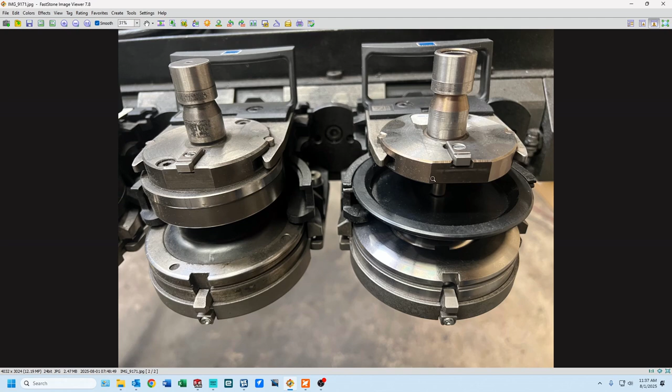And these are the differences in a forming tool and a standard tool. So we have the forming tool on the left, and as you can see, there is no stripper plate. This is a standard tool on the right, and you can see that this black plate right here is the stripper plate, and what that does is it actually strips the material off of the punch after each punch.

The reason why that's important is because if, after you hit this and form this up, you were to go back over this form with a standard punch, that stripper tool would either mash this down or it would get caught on this as it was traversing the sheet, and it's going to cause problems, could cause damage. It's definitely going to mess the sheet up. So we want to avoid interfering with our forms after we punch them.

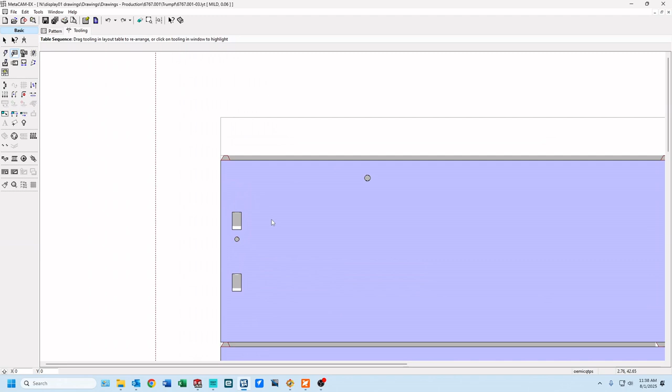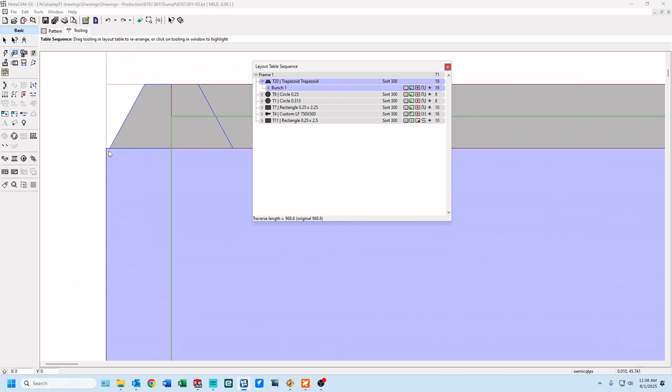So I've got an example right here of the part that we were just looking at, and this is what the form tool looks like in 2D. And so these are the parts, this is the program, and as you can see, we do the trapezoid first like normal, and that's our wire joint right there on the edges. That's what's going to hold these parts together so they don't go flying everywhere. Then we do the circle, then we do the other size circle.

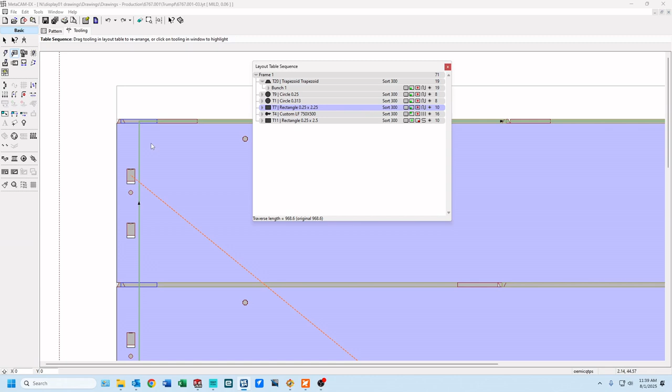Then what I did on this one is, if you look, I've got one punch that is 1/4 by 2 1/4. And what that does is it hits one time right there on the edge all the way up the sheet. So it hits up this side, traverses over, and hits down this side. So right after that, I'm going to use my custom lance and form tool. And so it's going to traverse over top of the punch that we just punched.

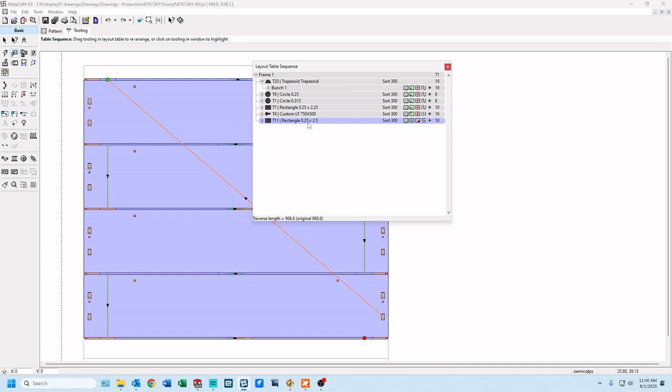And the reason for that is, once we go with this 1/4 by 2 1/2, you can see where it traverses and it never goes over top of the form. And so this is what you're looking for. You have to be very careful when you're doing this. If you were going to use a regular punch after a forming tool, then you've got to make very, very sure that you do not traverse over a form, or it's going to get caught.

We also have a tool for this. This tool is a regular rectangle, and the one we have right here is a 1/8 by 2.9. 2.9 is the longest punch that we could get on our diameter of tool, and it's called close to form. This tool doesn't have a stripper plate. It has a urethane stripper on the tool itself, on the punch.

And so every time the punch punches, the rubber or the urethane actually pushes the material off the punch, but the urethane is actually bolted to the punch. So what that does is it allows you to go over top of forms and it doesn't get caught. And so the machine is actually looking for a tool without a stripper.

So every time you form, after a form tool, the machine will error out if you use a regular punch. We have a way around that, which I'll show you in just a minute. But ideally, if you form, you want to use the close to form tool after that. If not, the machine will give you an error saying that it can't do that because the tool's got a stripper on it.

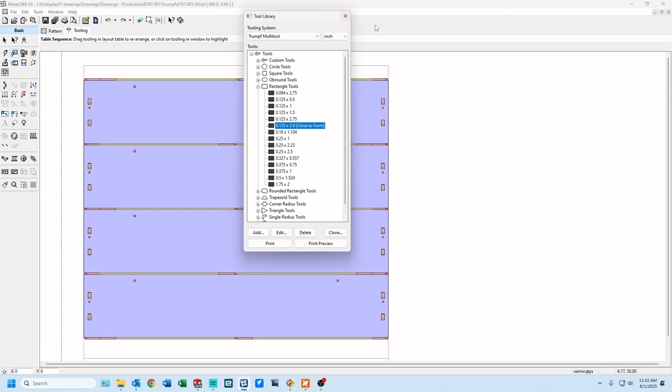So if you look in your file explorer on the server, you go to the server, machines list standards and control, Trumpf, there is a picture or a PDF on here that I created that will show you how to do that, and it's called punching after forming code. And so the way you do this is, if you're going to use a standard punch after a forming tool, you have to go in and put this highlighted line after the last tool.

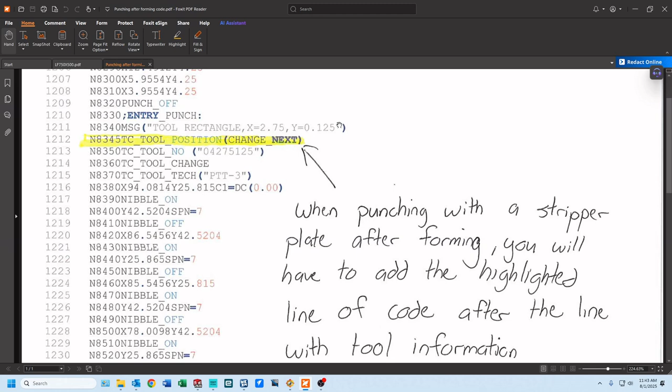So if you looked up, there'd be the code for a forming tool up above this. And on this particular program, I'm using this rectangle. It's a 2 3/4 by 1/8 rectangle to cut out the part. So this is my last punch. So when you're looking at the code, you go to your last punch and you put in this line. You have to do the same thing as when you do a tubing laser.

All these are in multiples of 10s. So right after this, it's a 40. So you just put a space, 45, and you enter all capital TC_TOOL_POSITION, and then no spaces, parentheses, CHANGE_NEXT, and then end parentheses.

And what this does is it tells the machine that it's okay to go ahead and use a standard tool after a forming tool. And I can show you what I mean. So this is a program that's already created, so we'll go ahead and generate the code.

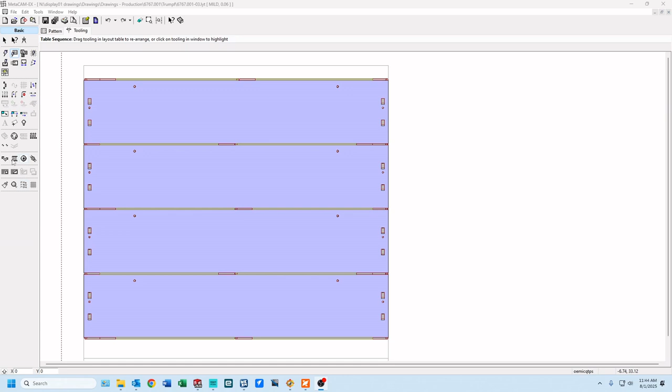If you were actually tooling this up and we're going to save it, you'd want to enter a dump for the nibbles, but since we're not going to save it, we'll just hit OK. And so when you get to this screen of the code, you want to click on the edit code icon, and you want to scroll all the way down till you see the last tool that's used.

And so when we scroll up, you can see it here, up above it says tool special, and that's the tool that we're using, the Lance and Form 3/4 by 1/2 inch. And then it goes through its punches, and so the last tool that we're going to cut out is this 2.5 by 1/4 punch. So right under where it calls out the tool,

you want to make a space, capital N, 1295. So it goes 1290 and then it goes to 1300, so we just need to make sure that's in numerical order. And you want to enter TC_TOOL_POSITION, start parentheses, CHANGE_NEXT, in parentheses. And so once you enter that in, the machine will allow that tool to be used.

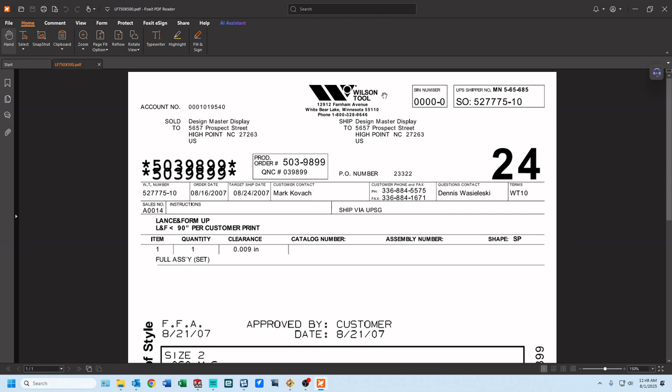this is the one that we were doing earlier. This is an older one; they don't look quite like this anymore. But when Wilson Tool or whoever made the tool gives you this, it's a tool type, forming tool, type 13. They give you the punch length, which you enter into the machine. They give you the optimal forming height, which you also enter into the machine. And then they give you your TDC and your BDC.

What this is, you're telling the machine, I've got so much stroke on every punch. The machine just figures that out. It's a set number, and it is what it is. So what you're actually telling the machine on the BDC, that's telling it how far it goes on the bottom, right? So you're telling this machine, I want to go negative 0.059 inches more than you normally would go.

So at 0 on the BDC, it's going to go to the standard. If it was a punch, it's going to go to the standard depth. So we're telling it we want to go almost a 1/16 of an inch more down, since it's negative. If that number was positive, then obviously it would go up, so it wouldn't go as far as it normally does. Same thing with the TDC.

This is the top. So 0 is, hey, go where you normally go on the top when you're punching. The machine figures that out based on how long your punch is. If you were to change that, a negative would mean you would go higher, and a positive means you would stay lower. And so the tool manufacturer will give you this. Now, I will say this, when you're first running a new tool, you want to go less than this, and you want to ease up to this number. You don't want to go too deep, because you could break the tool.

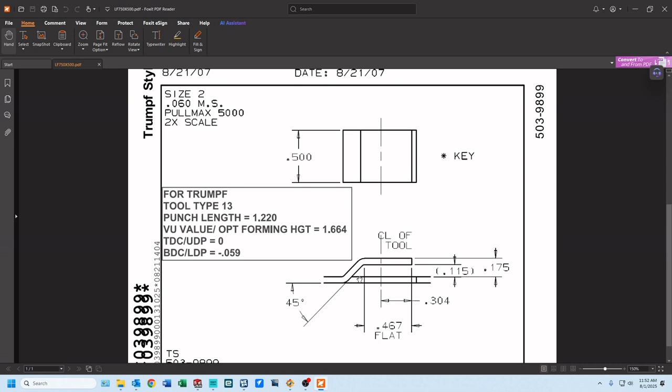And then I don't think anything else gets changed. I think all these other properties just stay the same. So again, you just have to enter your identity number, no more than 8 numbers. Forming tool, you have to tell it yes. And then a plunge position, you have to give it that, which again comes from the manufacturer of the tool. And so that's how you would set up this forming tool.